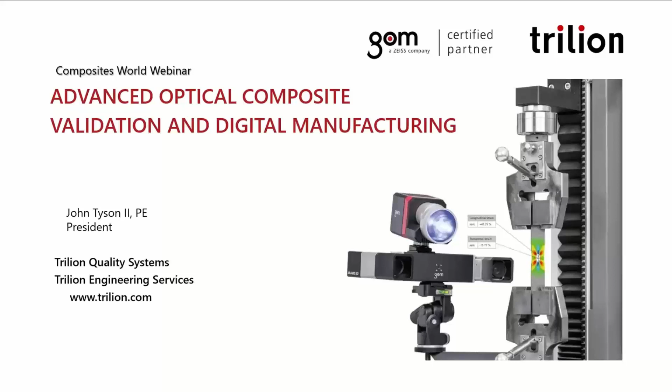Thank you, Ginger. My name is John Tyson, and I wanted to talk about how optical metrology is able to bring advanced capabilities to the composites manufacturing world, and a little bit about how the technology works. So the technologies that we're working with are a stereo imaging capability. So just like our eyes can see where something is in 3-dimensional space, we're able to use digital cameras to make these measurements very highly accurately and in a full field way, like humans see things.

So our metrology toolbox starts out with ARAMIS, and this is our core tool for tracking deformations and strains in materials in a full field way. All our sensors are like mechanical sensors, but these are as accurate, if not more accurate, than your typical mechanical sensors of strain gauges, displacement sensors, accelerometers. And it works directly with your finite element model.

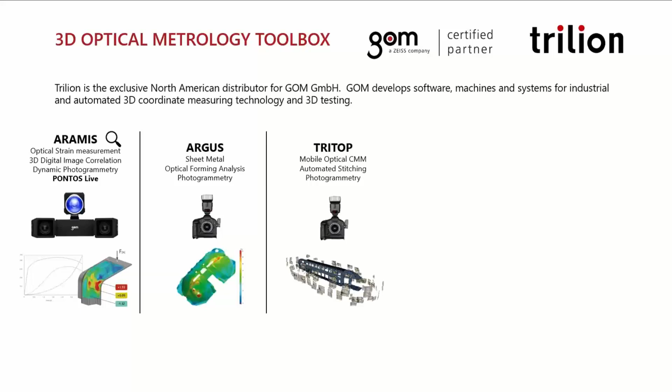Our ARGUS technology is now used in basically all the stamping in the United States and Canada for metal formability. And so basically all facilities of GM, Ford, Chrysler, Nissan, Toyota, Honda use our equipment for studying the formability of sheet metal. TRITOP is another tool that we use as sort of a portable CMM. We can make measurements over large structures, and it also provides automated stitching for our other measurements. So it allows us to, in this case, look at a railroad car and map all our measurements from any one of our other machines into the same coordinate system, and all in CAD coordinates.

We also have a full range of CT equipment from the GOM CT through a complete set of Zeiss CTs that we use for additive manufacturing, as well as a broad range of materials where we can look into the structures and see dimensionally how the structure was made. And then our ATOS systems allow us to do structured light measurement of structures. So this is basically white light scanning. We now call it blue light scanning, a single frequency, which allows us to make precision measurements on parts. And so all of these technologies are high precision measurement tools for industry, and you're able to make measurements over the entire structure or throughout the structure in really strong ways.

We also have a number of other kinds of technologies. Our high-speed camera technology allows us to take these same tools into high-speed realms, all the way up to millions of frames per second, depending on the application. Vehicle drop tower crash work to high-speed material measurements, ballistic and blast type stuff.

Our 3D thermography is also very wide-ranging and capable. Developed originally for the B-2 bomber program, this allows us to do in situ measurement of materials and structures during manufacturing, non-destructive testing, as well as structural health monitoring. And we offer all of this as engineering services, having gained the experience of how to use these and be able to help our customers in a really strong way to implement them in the best way possible.

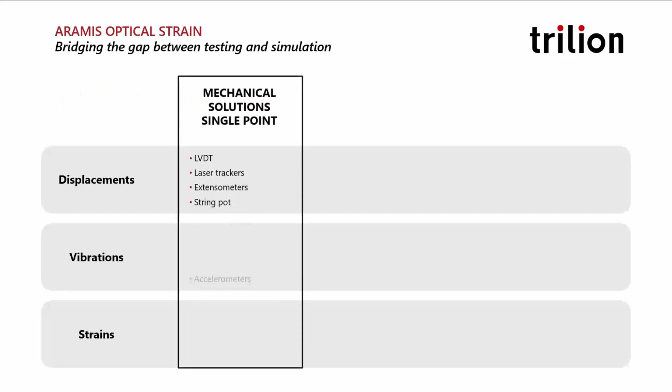So getting into the ARAMIS technology, this is a full field optical strain measurement capability that allows us to be able to measure what mechanical sensors can normally measure. But when you have a finite element model, it becomes crucial that you understand holistically what's going on. And that's where our tools come into play, where we're totally able to integrate with finite element model, with CAD, and be able to understand dimensionally and locally with strain on how the materials are performing.

And these, again, are all measuring 3D coordinates, deformations, and strains. It doesn't really matter what the material is. So we can look at complex material sets to understand how they're working. In real structures, in real testing, we're considered an A-class extensometer. Most of your extensometers in material testing are Class B extensometers. Where we're measurable, we are considered a Class A extensometer. So we're as accurate as any of your other mechanical sensors and can be much more accurate depending on how you configure the system.

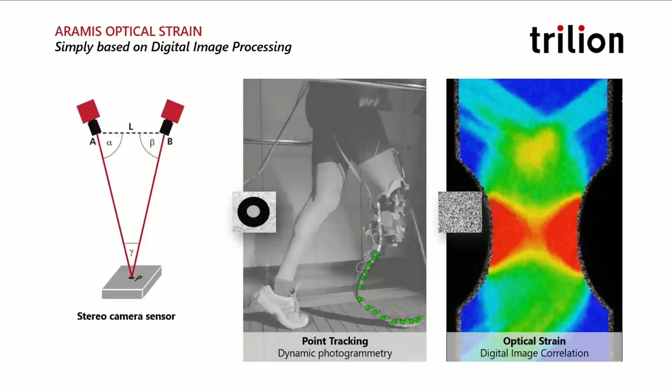We can also put a pattern down, and the pattern allows the software to create its own targets throughout the pattern. And so we get a continuous realm of node points across the surface. In this specific case, the finite element model or strain gauge might be able to get an understanding of what's happening in the gross considerations here. But we're able to see even the Lüders bands that are occurring, which is a crystalline level structural effect in this steel.

So we're using a stereo imaging tool. We can bring in the CAD, so we're in true CAD coordinates, and we're imaging holistically the entire part of the specimen in a very quantitative way. We're non-contact, so our measurement testing is just minutes of setup to make measurements that traditionally take days or weeks to prepare. We're full field, so instead of being able to see the areas of concern that you know about, we're able to see holistically what's going on. And so you really understand how your whole structure is performing in a really solid way. One good user at General Atomics said, if you're not using digital image correlation for your measurements, you really don't know what's going on in your composite parts.

So it's an engineer's toolbox. We're measuring true 3D shape, deformations, strains, accelerations, all this kind of thing. It's all optical, so it doesn't matter what lenses we have on there. We can go from very small fields of view to very large fields of view in order to understand the dynamics of materials or systems. Again, because we're measuring displacements and shape, we're really completely material independent. If you have metals working with elastomers and composites and complex configurations and metallic inserts, we're measuring how all of these components work relative to each other, which becomes really powerful for finite element modeling, because most of these interfaces are just assumptions that you have to make.

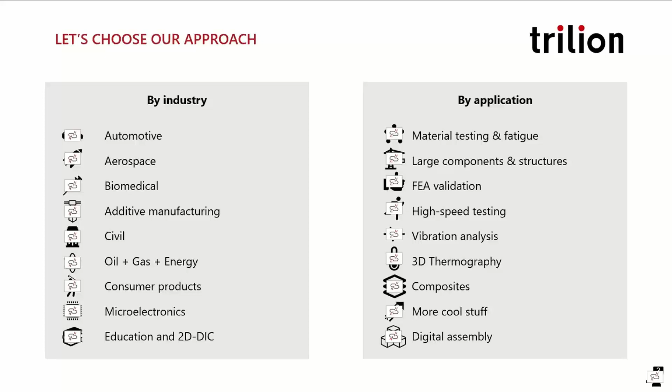And as you can see, some of the industries we work in and the kinds of applications that are used. So getting into material testing is really the beginning concept of, what are your materials doing? And this is, of course, crucial to everything from designing a product to its final operation and its long-term success.

With material testing, we're able to holistically understand what's going on and quantitatively measure very precisely the complexity of modern materials, and especially when you're getting into composites. Understanding the true material properties and failure modes, these kinds of things, are quite crucial.

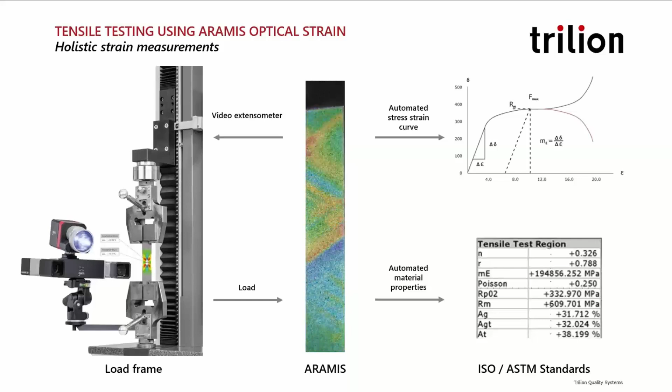So typical examples are the precision measurements of not only local considerations, but global considerations. And so, clip gauges or strain gauges might give you some global response, but ARAMIS is able to track in that necking and fracture area. Also getting into flow fronts and local material characteristics.

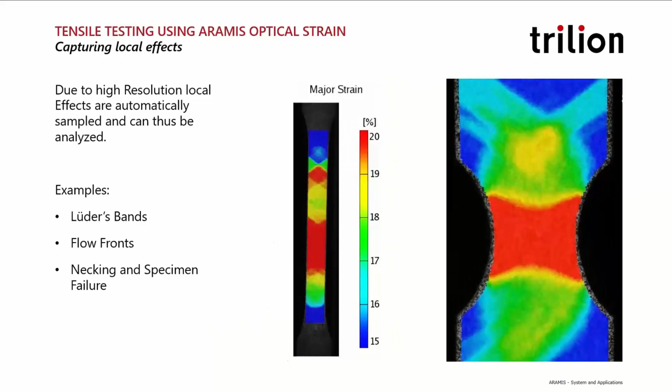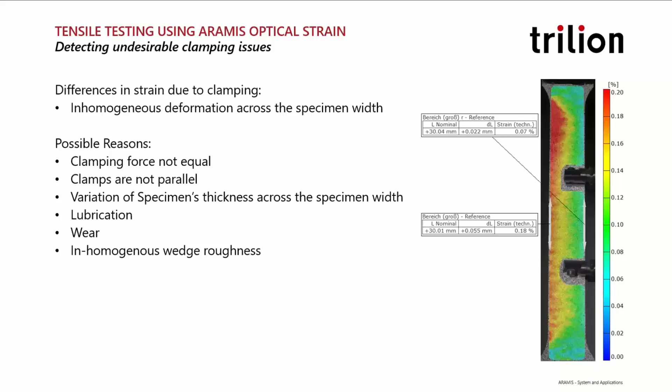So what concerns you have typically are with making measurements, like in this clip gauge here, you can see it's not measuring what you think it's measuring, mainly because maybe clamping forces weren't actually equal, or the clamps weren't parallel, your fixturing problems, that kind of thing. So it ends up being a really powerful tool.

NASA proved that ARAMIS materials measurements are more consistent in making material property measurements than traditional methods. And they use our technology continuously for doing this. So the idea of being able to precisely measure your materials and get consistent material properties is crucial to everything we're doing in the industry.

Typical example here, in a 4-point bend test, we see actually just using a mirror, our system doesn't care, and you see both the tensile and compression sides of this specimen in a very simple way. And again, just a very simple setup.

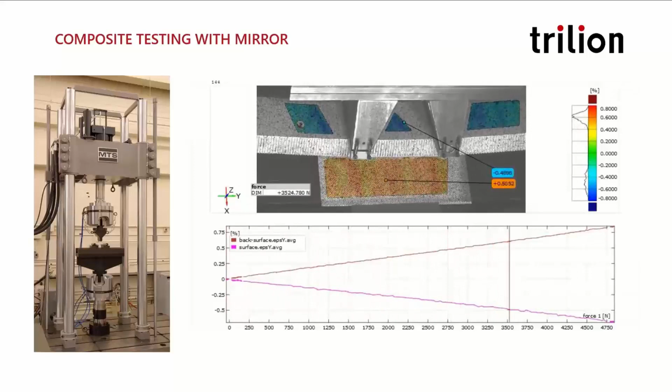You get into shear testing, and this becomes just a really powerful feature of the technology, because shear is typically how one plate is moving relative to the other, and you're going to make assumptions about the shear. But here we get hundreds of measurement points through the shear region to truly understand how shear works.

Actually, this is how I originally got into digital image correlation, working at NIAR. We had some shear panels like we see over on the left there, and trying to do that with holography 20 years ago was a little too difficult, and digital image correlation turned out to be the perfect tool for doing this. So it's really taking the capabilities of what holography could do in the scientific lab and taking it out to be a real mechanical engineering tool.

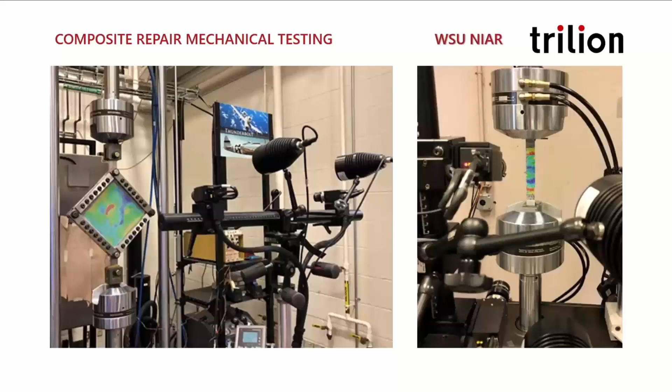Then you get into things like fracture, and fracture, of course, is very complex. One of the powerful tools is that not only are we measuring mode 1 characteristics like a clip gauge could measure, but we can measure mode 2 and mode 3 just as easily along the entire length of the crack, in any application, even in the field.

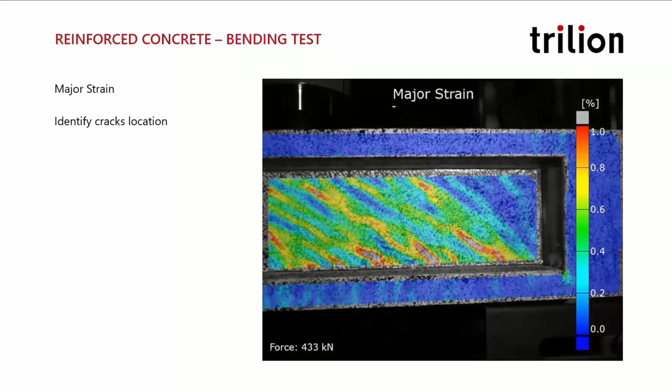Another good example is instead of having a notch specimen, you can just run a fracture test and watch how your cracks are propagating. And then after the fact, put down your displacement sensors and measure the displacement of the cracks that developed. You're seeing the data after it's happened, and now you're able to measure precisely what's happening to the component. Once you know the final result, you can put your gauges down after the fact.

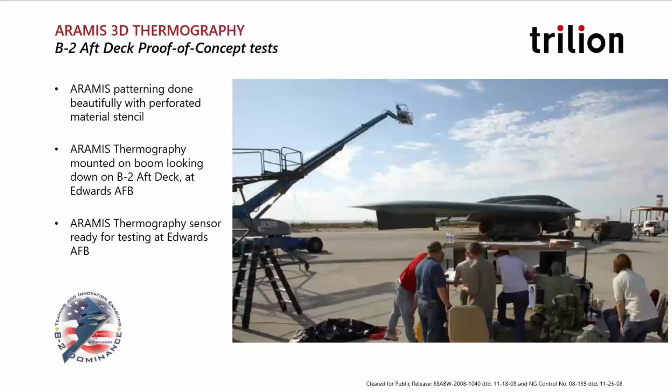One example of this was working with the B2 program. We developed the ability to do digital image correlation thermography. And so ARAMIS thermography allowed us to look at the aft deck of the B2 bomber with the hot gases flowing across the surface of the deck and look at the fracture in these components. This helped them solve a problem that had been nagging the Air Force for 20 years.

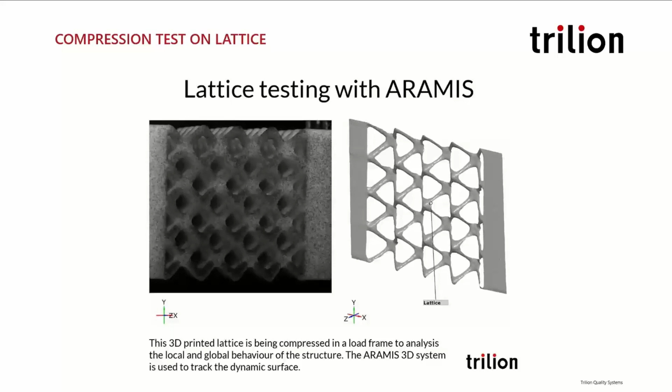This is quite powerful when we get into additive manufacturing applications, where either in testing additive manufactured parts or in the assembly of them, we use ARAMIS for doing metallic assembly. So the thermography is able to look at the weld bead while we're building, and the ARAMIS looks at the development of strain and the strain effects in the material as we're building them. You can see that understanding things holistically really gives you tremendous information about how to look at additive manufacturing applications.

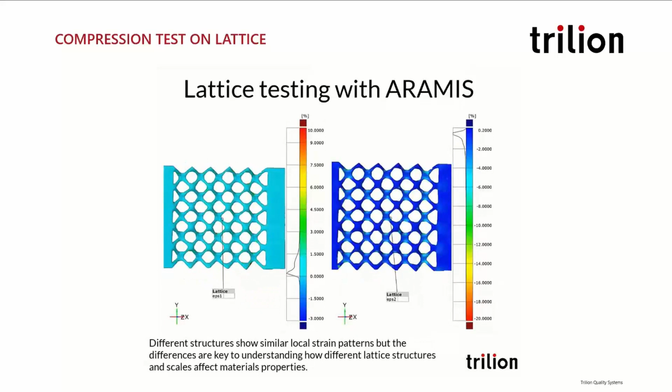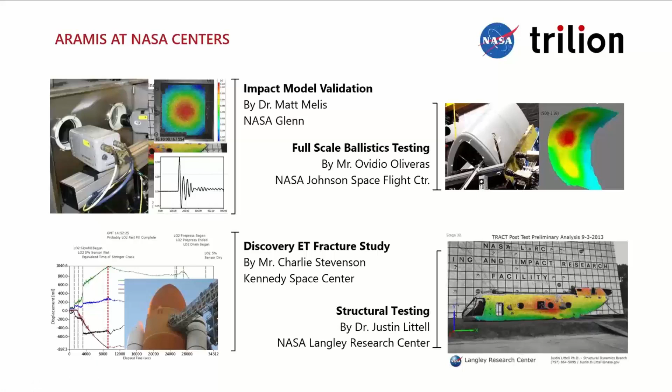And then at NASA Langley, a substantial amount of impact testing of not only vehicles, but spacecraft, that kind of thing. And you can see here's the Orion spacecraft dropping into a tank with our coded markers, hot-fired rocket motors, and the HIAD 25-foot diameter component in a high-speed wind tunnel, looking at the re-entry conditions during landing on Mars.

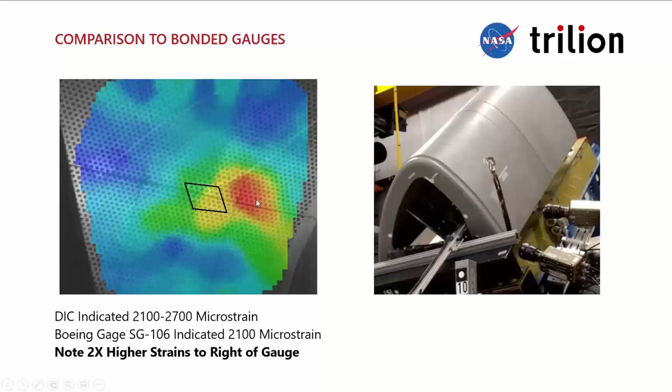And this is the ballistic impact of the leading edge of the space shuttle wing, and you can see our impact area, and this is the data that was used to validate the models. Notice the strain gauge that was in the field of view completely missed the impact itself, and the full field really answered the questions.

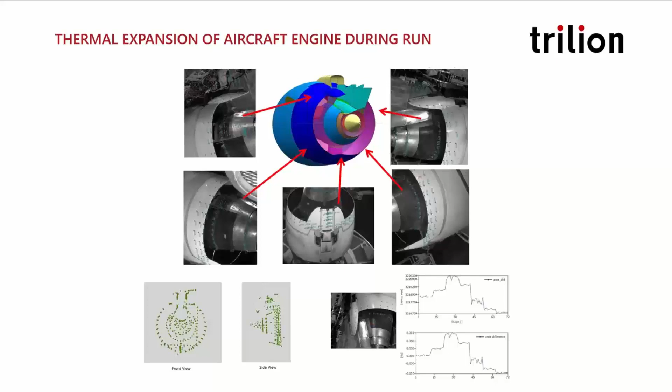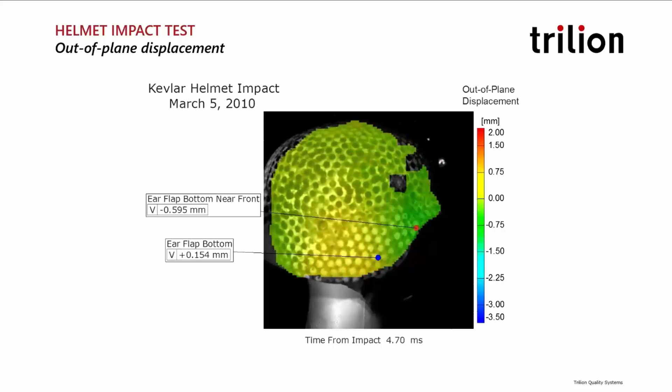We were also used on the structural testing of the Boeing 787. There were 10,000 foil strain gauges on this vehicle, but our 4 ARAMIS systems in and around the wing root added another 200,000 strain gauges. And this was crucial for the FAA certification.

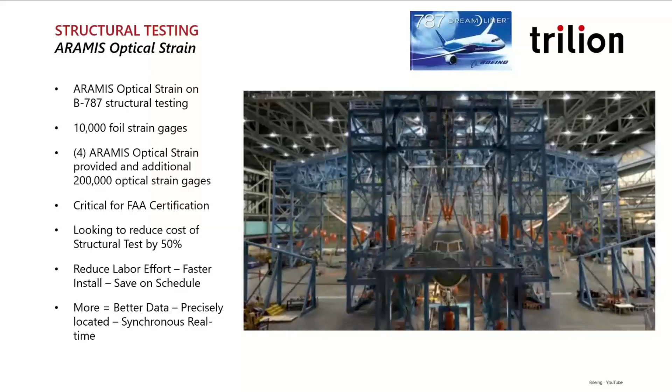But in the next generation testing, we're going to be reducing the costs of testing by 50% by reducing the labor requirements and faster installs and saving heavily on schedule, but also providing better data and synchronous data throughout the whole testing structure. This is some of the testing that was going on with the loading. But anyway, the wing root area was crucial to the measurement.

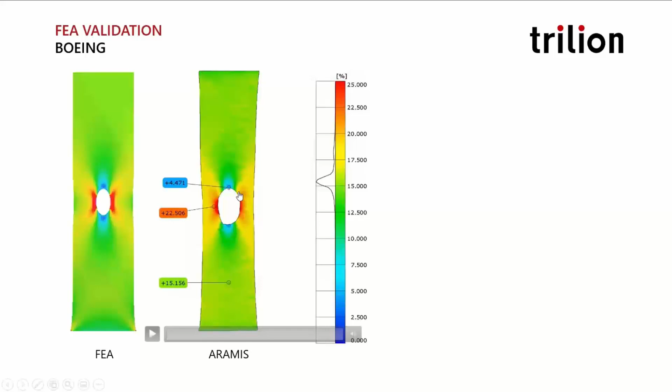So model validation has been crucial to the implementation of the technology. And in simple material structures, the model and our ARAMIS result, which the Boeing FEA guys say is seeing the reality of what's really going on. In simple homogeneous materials, you're seeing good equal response in the ARAMIS result versus the finite element model. The local variations here are true local variations in the material. So you're seeing right down into the material structure.

But when you get into real components, the model versus the reality is sometimes very much different than anticipated. And you can see in this case, a strain gauge expecting to see a high strain concentration right there, where it was not seeing anything, caused by structural defects in the material.

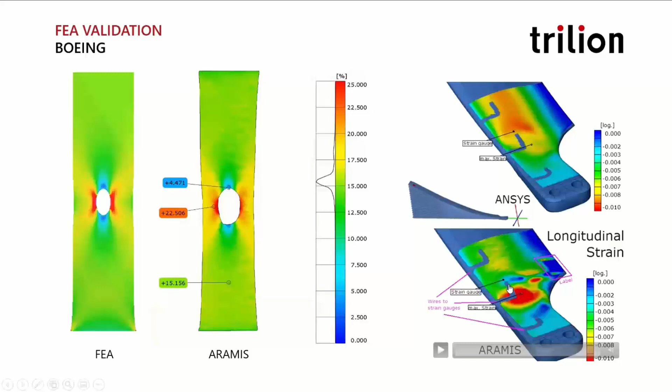So at Boeing, a VP had said, find a better way, because strain gauges were costing too much. ARAMIS was 10 times cheaper to use than regular foil strain gauges. It was a 50 times improvement in manpower, so much simpler to install and implement, and 100 times more data. So we used this on the FAA certification of the 787, and it's been used on the 777X and various other program plans going forward.

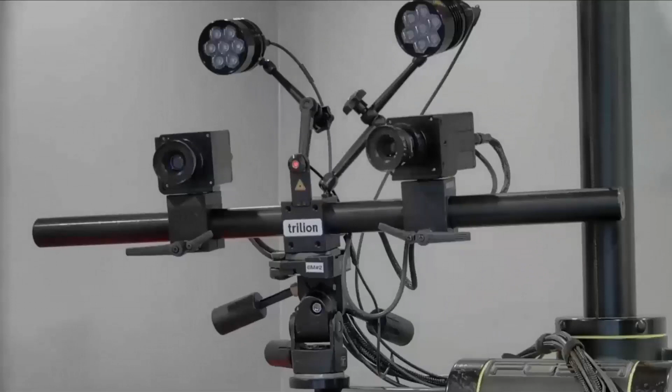So let's give you a little demonstration of the technology, and this is a typical stereo system. This is an adjustable base, so it's simple to set up and very flexible for lots of different applications. And you can see that the cameras can be adjusted right and left. We have some lighting that's nicely adjustable. And so we can then aim and point this to the desired area of application.

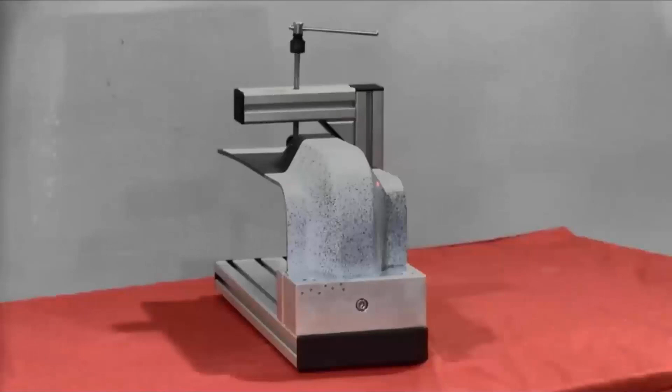And so typically either on tripods or camera stands, it's easily adjustable. Now here's a typical example of a part. This is a composite sample that we're just going to structurally load, so we can just take a look at it. And this is how the software is working. You're seeing the views from the right and left cameras, and we've patterned the surface to create the pattern that we'll be measuring.

Simply setting up the system and choosing the choice of triggers you want to do, the speed of the measurement, all from a simple toolbar. You just follow the steps across this toolbar to run the system. So now it's ready to start measurement. The original calibration to calibrate the two sensors probably took 10 minutes. So it gives you a sense of setup time.

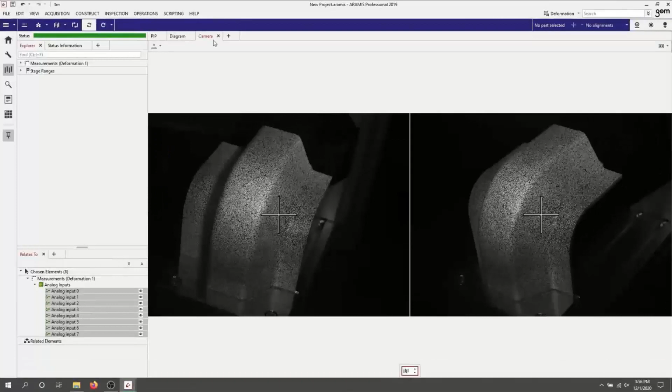And so Joe is sitting there bending the part a little bit and comparing the part. So we finished the test, and this is just a manually loaded composite part. So you can see the bending that he had done to the system originally. And you can just use the bottom toolbar as a time bar and just adjust the time as desired.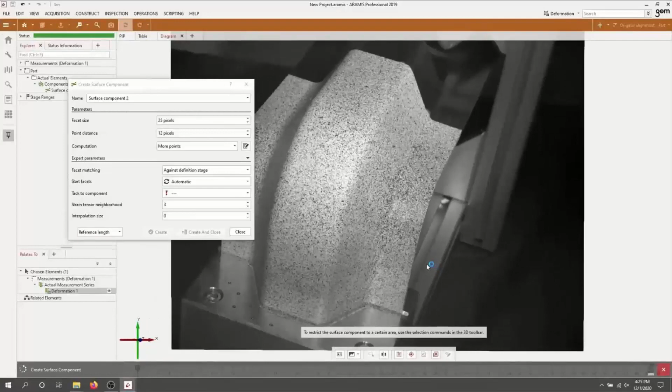Now we can create a surface component, and the surface component allows us to just create a surface from the dot pattern that we're tracking, and it's now calculating that. So here it created that, and it's broken the whole image up into these little windows called facets. And this facet is how we get a 3D coordinate point. And then you can see one a little bit to the right and a little bit to the left. So that's the next one over and down.

So there's probably 10,000 measurement points across this surface. So you can see at the center of each one of those nodes is one of our measurement points. And it would be a rosette strain gauge at any of those points, or a 3D coordinate point, whatever measurement you want to make. And over time, you were looking at velocities and accelerations.

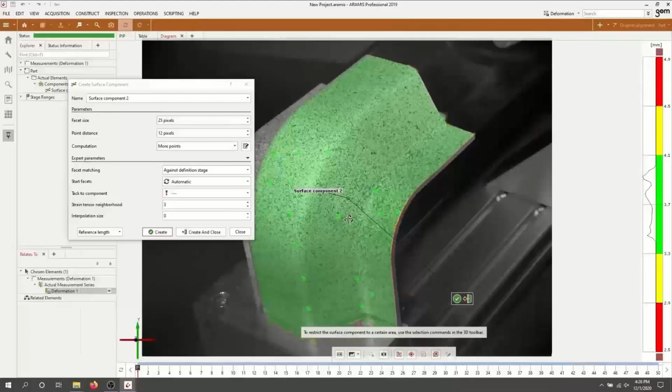So he can just mark off an area if he wants to establish a measurement region, so the software doesn't have to look beyond the area we're interested in. And he set it up so that we can look at the reference length. So you can see here the gauge length across the field of view is something in the realm of between 3 and 4 millimeter gauge length for our strain measurement.

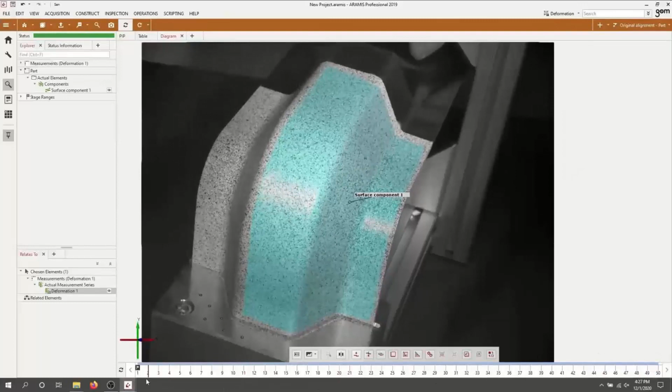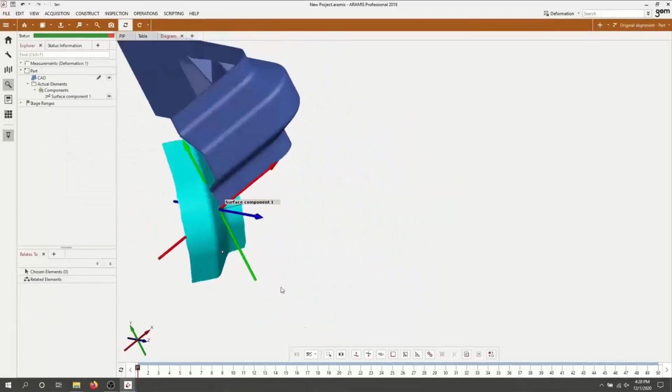So now you can see the surface component is tracking well on the motion. And he can now go in and create whatever parameters he wants to look at. In this case, we're seeing the reference coordinate system from the cameras, but we can bring in the CAD and now get into the true CAD coordinates. So we know all our measurements are consistent with the CAD. And you can see this structure has internal ribs and various other things that are of interest.

And so he's going to do an alignment of the CAD and the component by just clicking on a point that might be close to similar on the two components. And then he can do a best fit to that surface component to see how it aligns. Boom. Now the two are aligned.

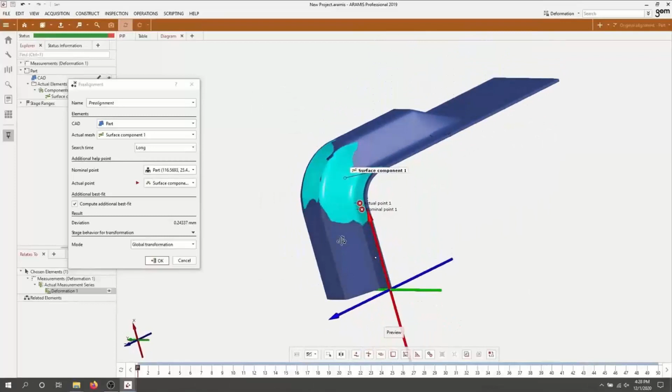And you can do further alignments as necessary, but basically you're now in the true coordinates of the part, and you're within a quarter of a millimeter of alignment across the whole field of view. So it gives you a sense of the accuracy of that alignment. And so now the coordinate system is in the CAD coordinate system of your design, and we can choose now what components we want to do. What do we want to look at?

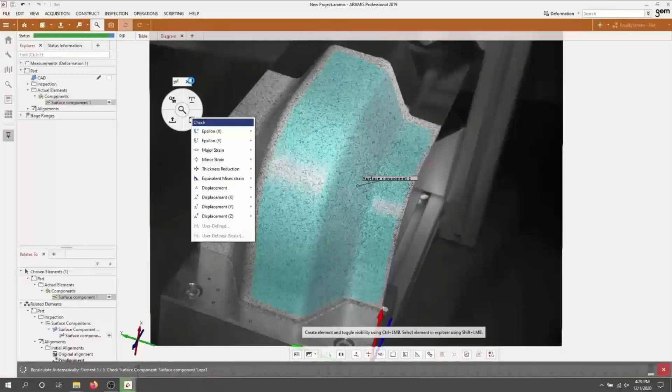Displacements, strains, velocities, accelerations, just hundreds of choices, but we can define the choices which we specifically want to do. In this case, looking at major strain in the system. Now calculating that strain, the principal strains across 10,000 measurement points. And so now you can see the strains during the test. It gives you a good sense of your strains going up to 9,000, 10,000 microstrain.

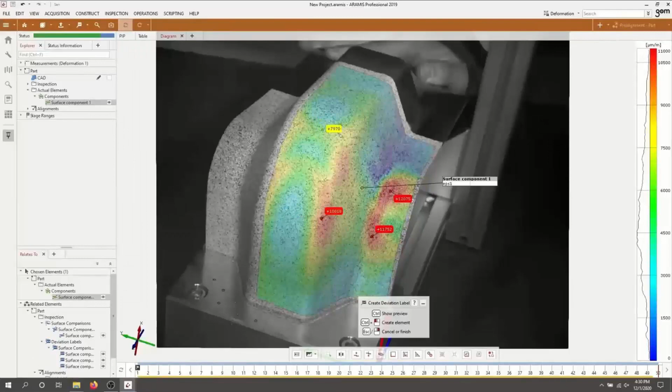And then we can use this to validate. We can bring in the finite element model and do a direct comparison to understand exactly how this matches to your modeling. And as you can see, you can put your sensors down after the fact. So in this place, he's putting down the specific sensors. Here, throughout the test, is the strain from the 4 sensors he put down.

And it's as simple as that. It didn't take hours of time to put sensors down and make measurements. And not only that, you can put the sensors down right where you need the data, not where you estimate the data will occur.

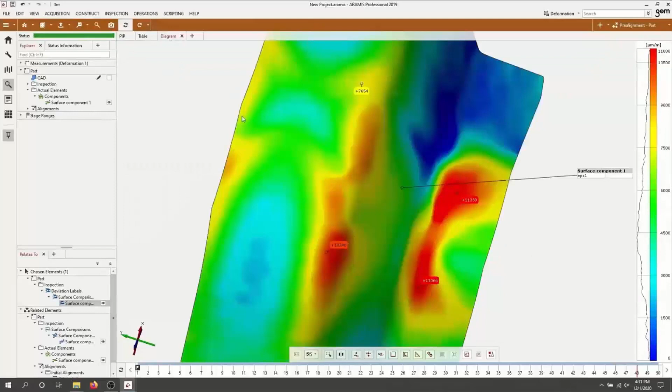And then you can generate a report on this really simply. And you can see the internal structural response on the surface there. Those strain fields were caused by the ribs inside. You can see those ribs. And so you can see the strain fields are directly associated with those ribs there.

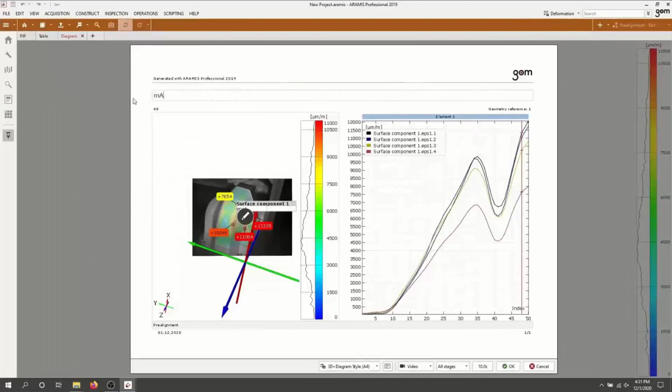Again, generating reports is just a piece of cake. Just click of a button, and you can generate the reports that you need as you need to. And you can do this all for the first part. And after that, this can be a template for every other measurement you make. So all follow-on tests you do are all reported exactly the same way. So they've all got the same scaling, the same configurations, and it's easy to understand how one result compares to another.

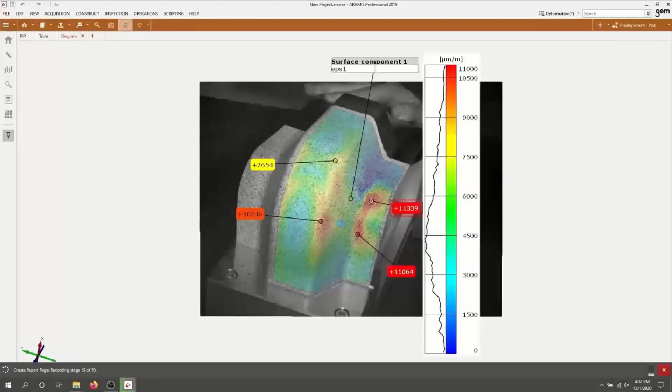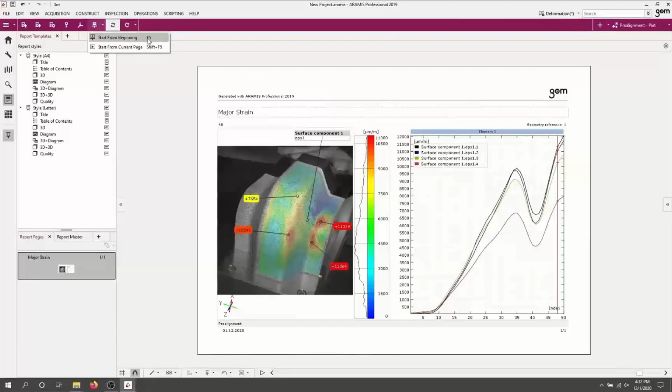And he's turning that into a video. And you can store the report as a PDF, and with modern PDF, it stores the videos also. So now you can have a complete video stored in your report. And again, you can see it's just taken minutes to do the entire test and the entire reporting all at once. So the speed is quite powerful in achieving all of this.

So let's get into digital manufacturing now. We've seen how this technology can be used for studying materials and really holistically understanding how a material and structure can respond. Now let's look at digital manufacturing and how these optical tools can hugely benefit us in the manufacturing world. So we can use this for in situ monitoring, understanding the quality in real time and being reported across your company structure all in real time. So everybody's in sync with how everything's going.

We can be doing digital assembly and monitoring the digital twins. So in digital assembly, we can be doing this toollessly. So instead of having strong hard tooling that is very expensive, 40% of the cost of an aerospace program is the tooling itself. So if we can get rid of some of the tooling and utilize digital assembly tracking and precision guided assembly, that can be very powerful.

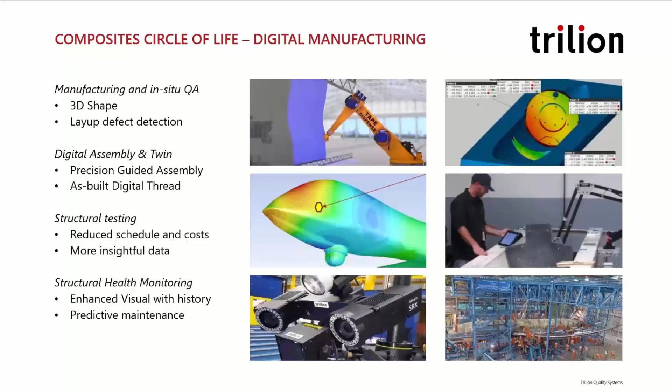Then we talked a little bit about structural testing and reducing the costs there and providing you much better data. And another really advanced area is structural health monitoring, using these full field optical tools to understand the health of your entire vehicle. So we'll talk about that.

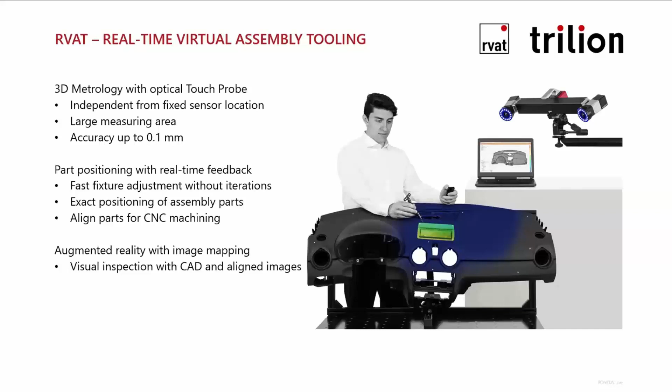So digital manufacturing and the digital twin: here we're able to monitor the assembly of components very simply and accurately. And it's based on our ability to just measure parts. In this specific case, this operator is measuring a component with a touch probe, we call it, and we're able to just 3D track the point he's touching by seeing the target dots on the component that he's using. And this is very dynamic and very flexible, and typically rapidly improving the measurements being made. They're being made directly to CAD coordinates, and very much faster, typically 10 times faster than traditional methods.

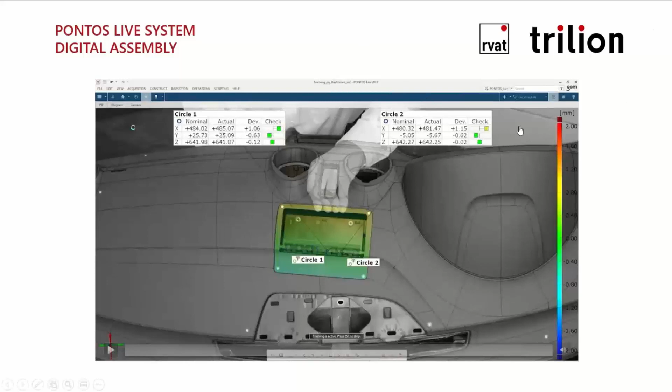Now in this specific case, he's assembling a dashboard, and he's tracking these two holes in the back of a component that he wants to make sure match to the CAD inside the structure. So here he's assembling the component, and you can see that the assembly is getting close to being precise. And this is the two mounting holes inside matching to a component inside, just seeing the outside of the component to be able to see how these are all matching, and checking not only against CAD, but being able to check against other products that you've made also.

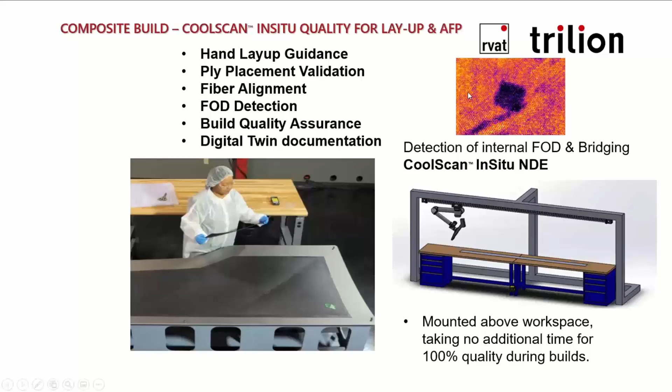So let's talk a little bit about in situ monitoring. In situ monitoring, we can work with the laser alignment tools to provide hand layup guidance, and then thermography capabilities to look for FOD detection and document quality assurance of the entire assembly in your composite layup, and the digital twin documentation of that. And you can see here some foreign material. This was a glove tip, and some bridging happening in this structure.

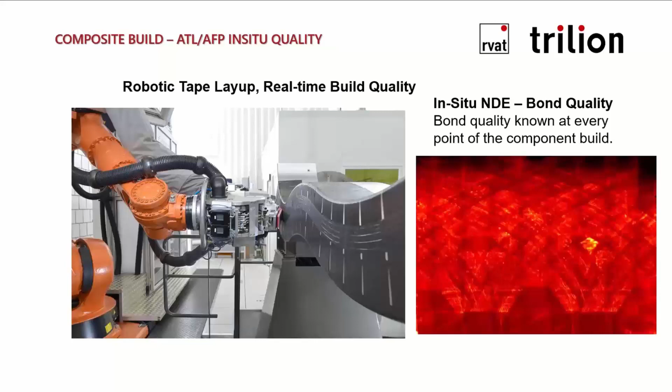We can also apply this to working in ATL and AFP applications of tracking the components and how the alignments are really working, looking for voids, FOD, and that kind of thing. And you can see here our thermography equipment on a robotic layup, and tracking the fiber as it's coming out of the robotic head.

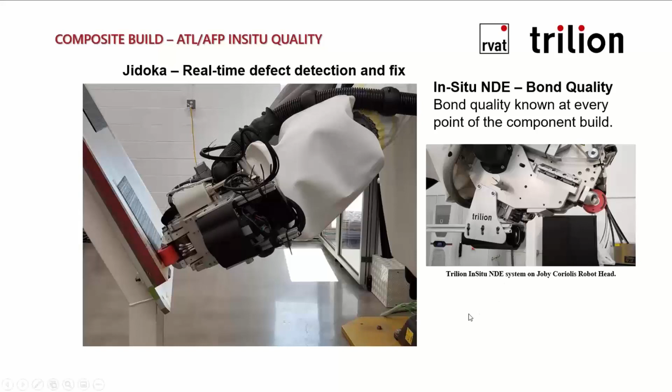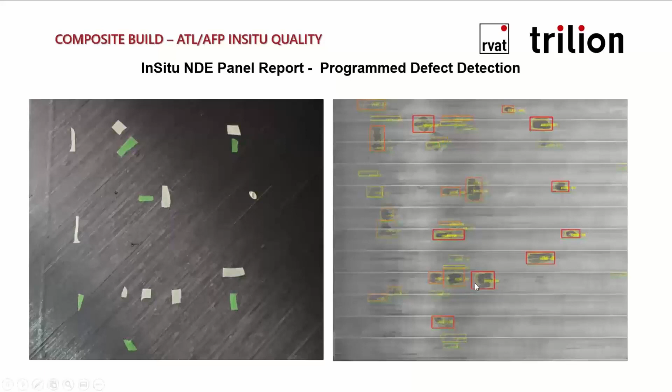And the ability to then, once it's in the digital twin, be able to then document every defect that's come through, what the acceptable below tolerance or above tolerance or close to tolerance parameters that you're seeing there, and how those document. We can also be tracking measurements from the quality inspector.

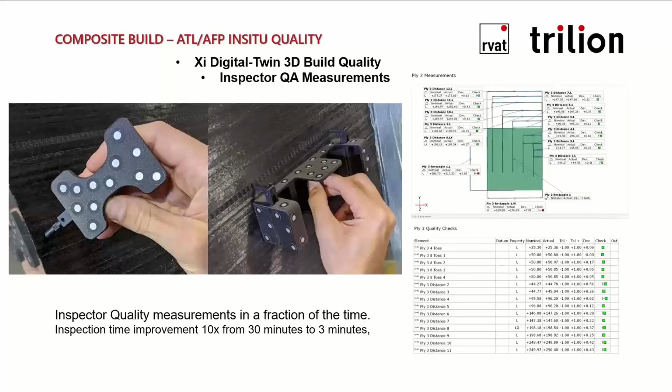And the quality inspector measurements that we are doing for the layup applications have literally been 10 times faster than the traditional methods, and completely documented automatically of how the alignments are all made, and each measurement as required.

So the idea of being able to provide the laser guidance, fiber alignment, FOD detection, then you're making a perfect part, so you can autoclave a good part. We can then 3D scan this part, get the true dimensions versus CAD, and then be able to do adhesive bonding, digital assembly, and QA checks all automatically, either with hand layup or robotic layup, in very good ways. All a similar process, and all being tracked in the digital twin.

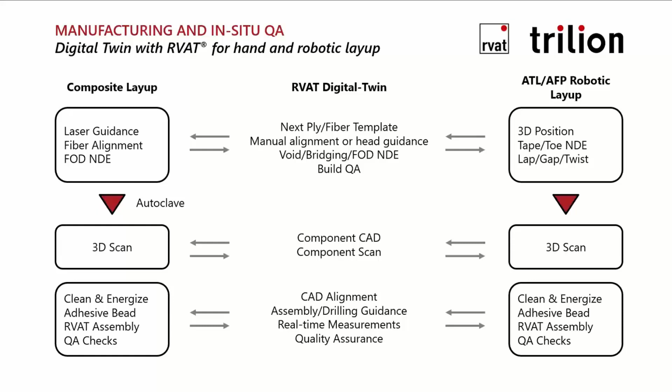So in digital assembly, we're going to be, again, using our system to track components. We're able to give precision operator guidance, and it generally is in the realm of 60% faster than traditional methods, and you're based on the true 3D coordinates of the component that you're doing, so you're much more accurate.

And also the idea that we can bring back knowledge from the manufacturing floor back into engineering in a really good way. In this sense, you're tracking the assembly of various components and seeing how they match to the assembly requirements. And after curing, you check to make sure that the parts are built to assembled tolerance requirements.

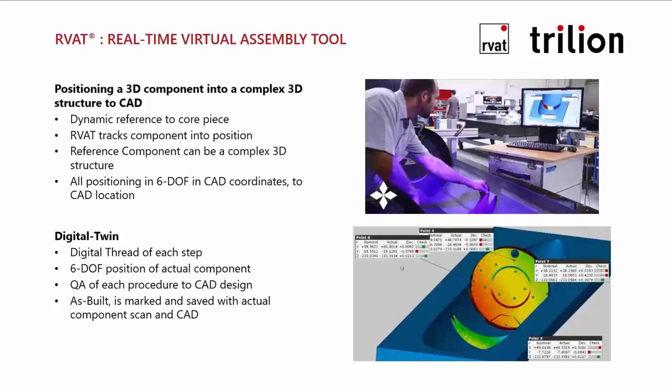We can also track things like click bonds and other components going in space or alignments. And we just put a tracking tool on and track it right into position. Or in this case, we have a drill guide tracking tool, and we can move this into position very accurately, in the 6 degrees of freedom motion of a true 3D component.

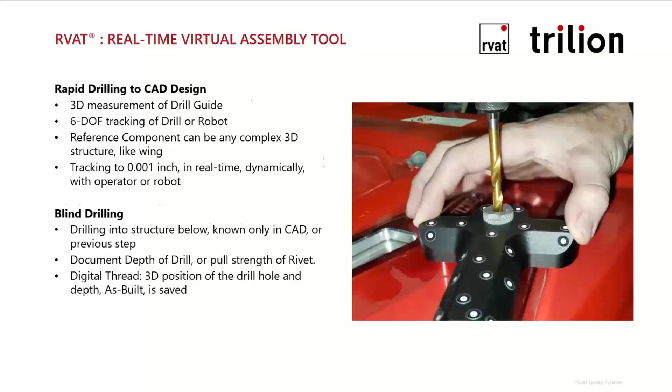In the real operational use, they found that the measurements we've been making on real structures, just using your standard operators, are so much more accurate on true 3D structures and way faster, typically 10 times faster. We can also measure manufacturing strains, which then become the baseline for long-term structural health monitoring, which we'll talk about.

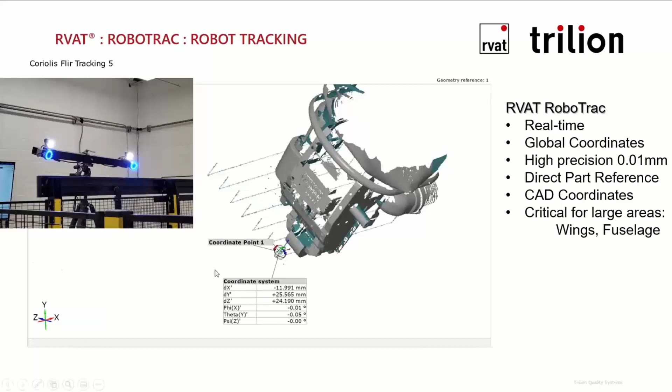So not only can we track people moving click bonds into position or drilling operations, we can track robots very accurately too. And this becomes much higher precision than traditional robots. And you can also use lighter, simpler, even mobile robots to do the work of large and embedded robots from previously. You can see here tracking the robot throughout its motions in 6 degrees of freedom. Not only X, Y, and Z, but roll, pitch, and yaw.

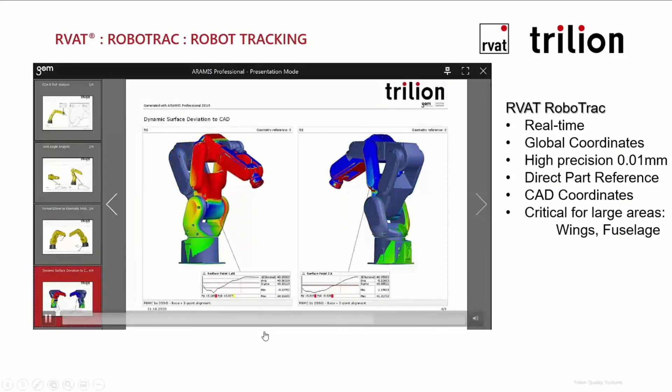And here's a little example of our use of tracking a robot. We have the CAD of the robot in the component, and here we're tracking 6 degrees of freedom, how this robot's moving, from whichever perspective you're interested in studying it. And more importantly, we know where that head is relative to the tool. In this case, you can also put it from the head's perspective or from the floor's perspective. And here you can see the motion of every component as tens of thousands of points all simultaneously.

So again, tracking click bonds into position, doing digital alignment, automated drilling operations, even blind hole drilling. I'll give you an example of that in a moment. And just doing general assembly. Again, getting away from tooling, if there's a way of reducing the costs, especially for custom articles and things like that, becomes very powerful.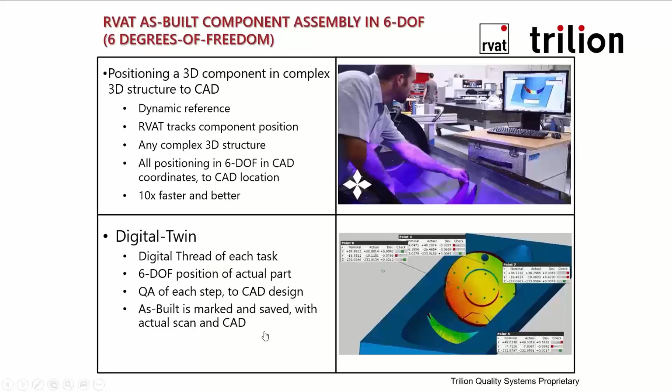So let's give you a little demonstration of this. This is Joe again giving a demonstration of the capability of an alignment using our RVAT, real-time virtual assembly tooling. So we've brought the CAD in to where we want to do this assembly, and we can track the parts into position. And in this specific case, multiple alignments need to be made, the composite assembly needs to be put on there, and we're going to put some click bonds on and do some drilling.

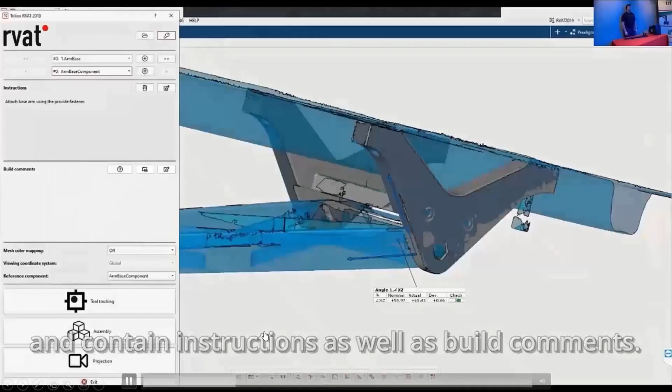And so you can track the instruction for each step, and the operator can send back recommendations on what needs to be done, how it could be done better effectively. Many times our operators are as knowledgeable as anyone on how to build these components. And you can see the alignment of each of these components into place and making sure that they meet the requirements. And when putting the composite sample on, we're going to mount some click bonds.

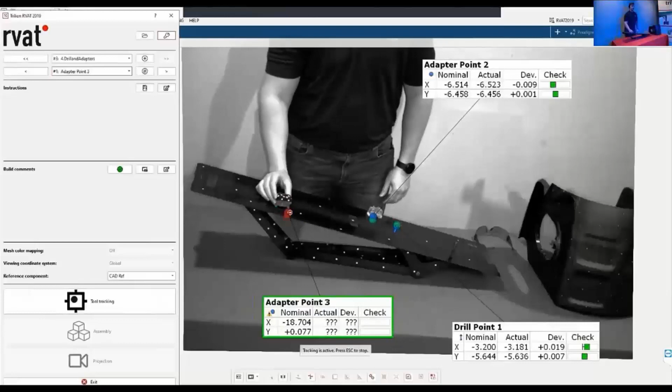Typically a click bond, I know one customer took 1.5 days to mount 10 click bonds. We can mount your click bond within seconds with much higher accuracy. And so it's just going from one unit to the next, just with our little click bond tool put on top that allows us to track it into place.

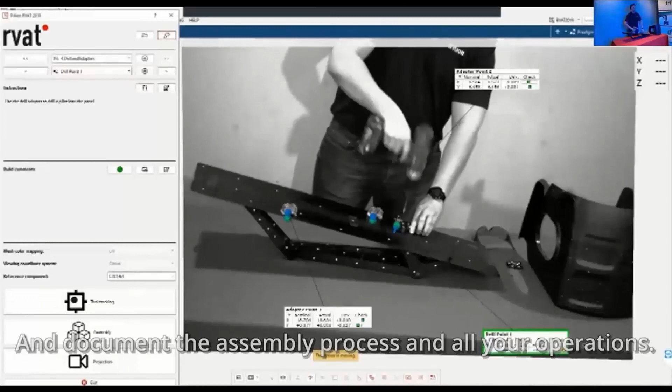Once the click bonds are in place, now we're going to do a sample drill. This is used extensively in composite manufacturing, and again, 10 times faster and hugely more accurate than traditional methods. So he's tracking it into position, and then he can drill it. Now this is a blind hole. This is a flat composite specimen, he's drilling into the hole below, and just not the kind of thing you can do traditionally.

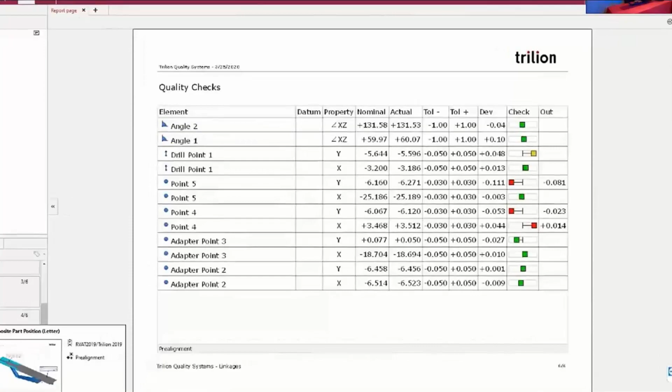And be able to report all of this very simply as a digital thread. It's all captured. The quality of each operation is captured as a digital thread into the digital twin. And here you can see the complete reporting of the work that he did, just as an automated report if this is a repeatable operation, and to be able to directly compare this to your digital twin.

So let's talk a little bit about the digital twin. What are we trying to achieve with our, we call it our XI digital twin. There's a lot of digital twins out there. You got to differentiate yourself here. So our XI digital twin captures these RVAT digital threads during the manufacturing process, and for each component we have the CAD drawings, the scan of those components, the engineering data, assembly data, and QA data that have come through all these measurements. And each becomes a digital thread in the manufacturing system and is then documented as built in the digital twin.

Then once you have the digital twin, you have the entire assembly of your vehicle, you can dive into a component. So it becomes a graphical digital interface to all your structures, your ERP, MRP, your engineering, and you can dive into a structure, look at all the engineering data around, in this case, say a wing spar, looking at the materials, baseline data, the QA data, assembly data, NDT data, all captured into the digital thread. And this becomes a complete graphical interface into all the components in your vehicle, making it a simple way of understanding all this data.

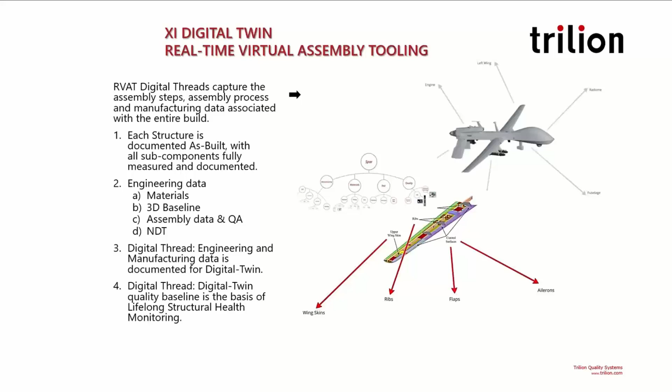And you're not dealing with the adhesive properties on some file locked in someone's desk. Here, it's all accessible to everybody all the time. So the idea in the digital twin is that we can go into a component in this specific case and understand how it's assembled. The quality of this is immediately reported to quality engineering. Quality engineering can buy off on this component assembly and/or fix it as need be in real time. So the parts are being made perfectly all the time.

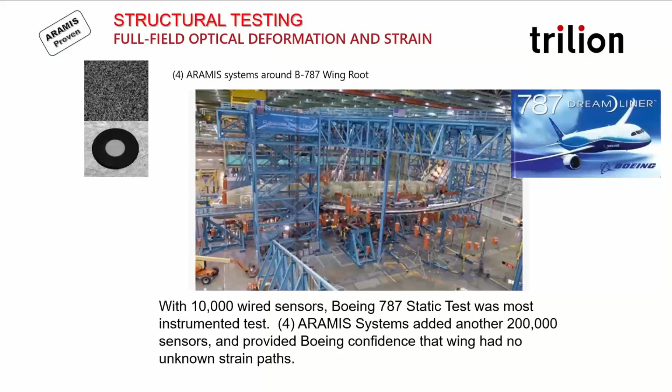That equipment paid for itself over and over again during the test, and is free from then on. So again, the idea of being able to make these measurements, if you assume that now the equipment is free, the testing is free and super fast to do. We did the similar structural test on the 787 wing and used this to validate the LS-DYNA models for the FAA to show that there was no load path that it didn't know about.

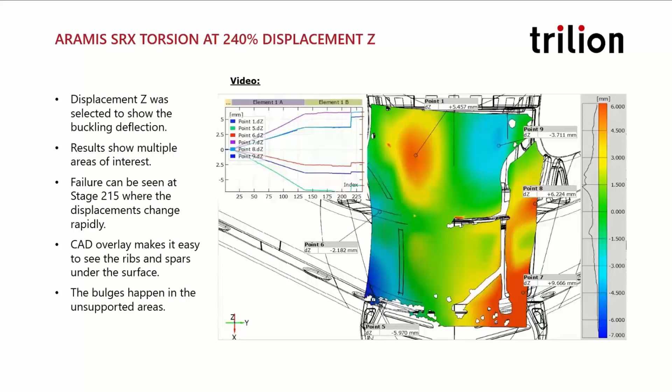And we can see the CAD overlay and the true displacements that are happening across the field of view. This is about a 6-foot field of view during this loading of the component. And then we can just switch to the strain. So here's your strain from all kinds of measurement points across the structure. So you can really understand holistically what's going on with your structures and the materials themselves.

We can then apply the same capability to entire vehicles or components of vehicles. And in this case, we see the CAD brought in and the strain at the base of a turbine blade. And this turbine blade was patterned with a ceramic pattern and put in a jet engine for 10,000 hours, a year of operation. And this is the creep strain from the blade.

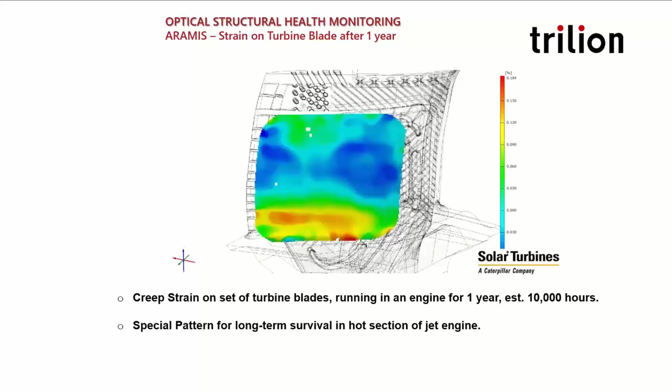Truly impossible measurement, but this was done and is now done on each new design. It invalidated one of their computer models and validated another one. And so now their products are just hugely more accurate than they used to be. We can apply the same technology to looking at any kind of structure, internal or external of a vehicle.

We've shown that ARAMIS is able to detect what is called barely visible damage. And so in this case, a slight impact. This was an invisible pattern in the aircraft structure. So we call it smart paint. And so it ends up looking like regular paint, but it actually has the power of millions of strain gauges.

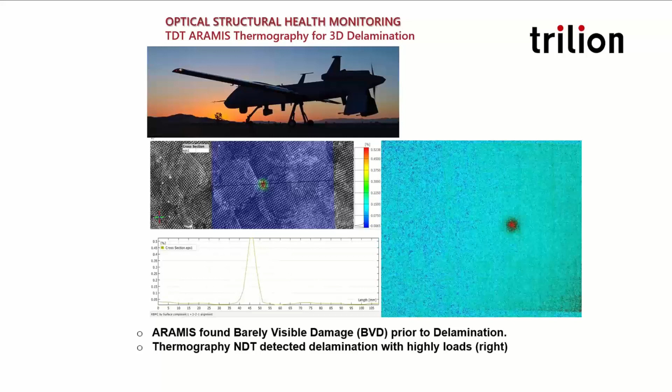And then with thermography, we can look at the extent of impact damage caused by strikes or whatever else, and understand into the structure what the effect of the defect is. And so applying this to complex structures, it becomes as easy as visual inspection, but it's enhanced visual inspection, and it has the power of trillions of strain gauges on your fleet.

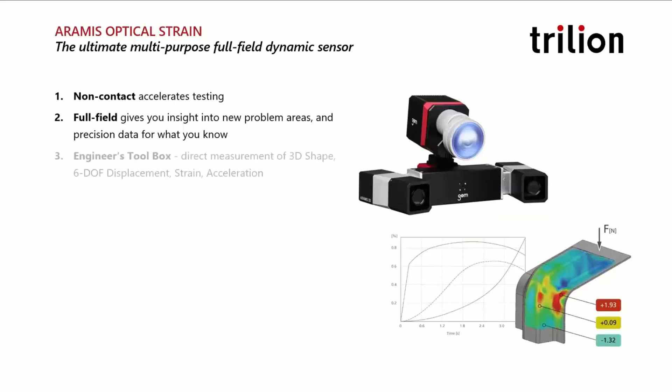So the idea of this non-contact capability and full field is this tremendous power for understanding composites. It really is this engineer's toolbox for dealing with advanced composites. And so we can use this on a broad range of materials and structures, from small material components to entire vehicles, be it static loading or dynamic loading, and adjusting it for your validation, and coupling all of this. Our digital twin provides deep memory and understanding of your structures and components over time and across product lines.

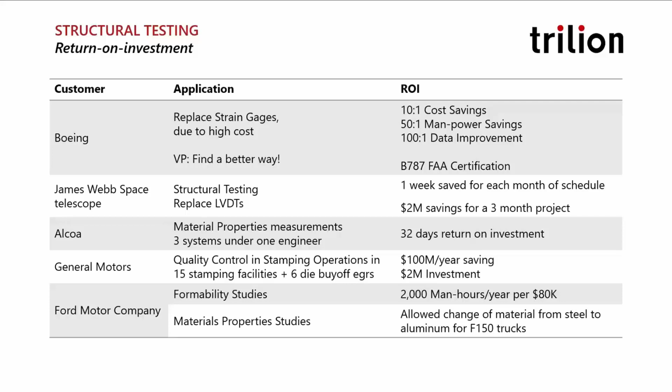And again, the savings is pretty substantial in each case. Typically, about 30 days is the return on investment when this equipment's really being used. That's just really powerful.